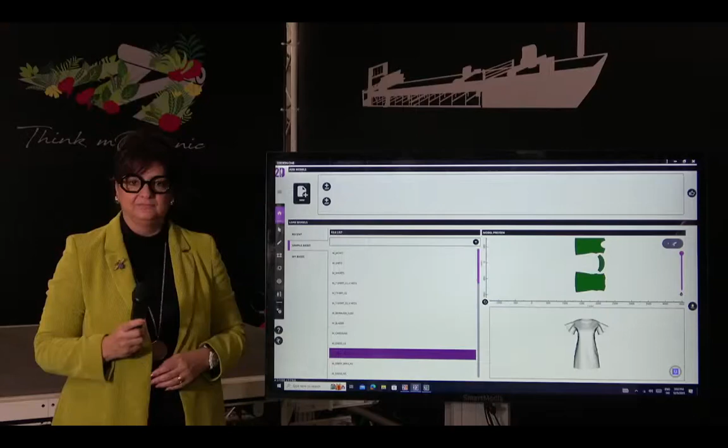I'm talking to you today from our showroom in our head office in Adro, Italy, what we call Morgan 1.

As some of you may remember, we started this type of communication during the pandemic when there was no possibility to travel, no exhibitions, no meetings, and that was the only way we found to communicate with our partners, distributors and customers, and share with all of you what we were doing here. We believe that even though, thank God, this time has now gone and we are free to travel, to meet, to have exhibitions, this is still a good way to communicate and share in real time what we are doing.

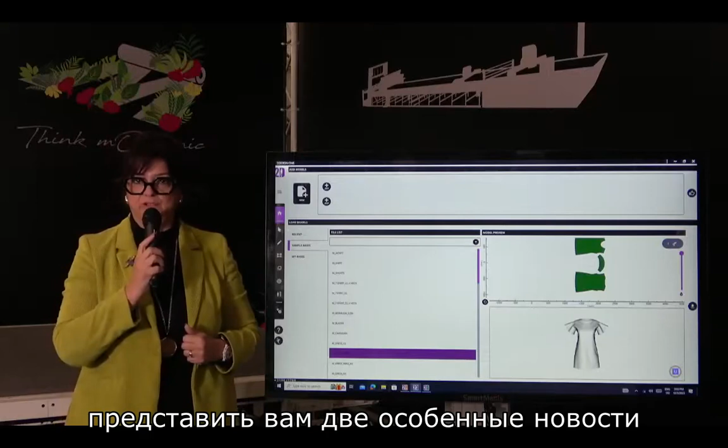Today we are here to present two very special pieces of news from our R&D departments. The first one we will start with is our new 2D CAD solution, especially the 2Design pattern designing module, together with the 2Capture and 2Tetrix.

Later we will continue with the presentation of the multiply cutter, the real superstar of the day, and its name is Rex.

Before I let Alessia take you through a general overview presentation of the software, I would like to spend a few words explaining how we made this project, and what our goal was in doing this project.

We wanted, first of all, to have full control of the software. So this software, all the packages, are completely made in Morgan. We are so proud of that.

I think Gianmario Bianchetti and his team from the R&D software department did an incredible job, because in just a short period of time they made a very, very strong and powerful system. You will see it in a few minutes.

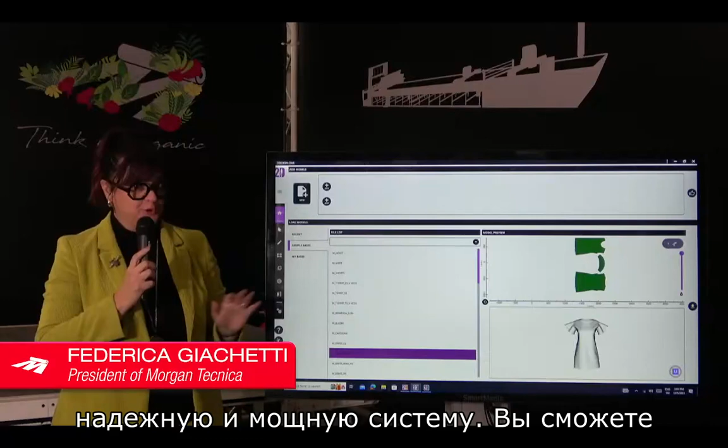One of the goals was to make it user-friendly. I know everybody says their own software is user-friendly, but this is for real. You will see, Alessia will show you a very minimal and neat user interface in order to make the new user immediately comfortable, and also to reduce the learning process and help somehow the self-learning of the software.

This is also very important. We know that the majority of the customers we are going to talk to are already using a CAD system, so in order to convince them to shift, to move to a new software, we must make this process as painless as possible. So making the learning easy is a really important goal.

Also, we want this software to be suitable for professionals with very high demands, but also for beginners, and this is very important. We want to create a new generation of CAD users growing up with us.

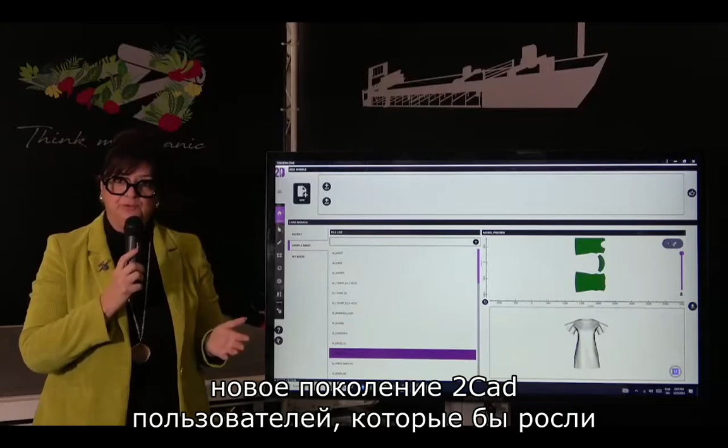So for beginners, we developed a very special feature called Sample Basis. It's a library of basic blocks that comes together with the software, a complimentary basis. So for those who don't have a library of old models, who don't have experience, they can start playing with these models, start gaining experience and practicing until they are ready to create their own models.

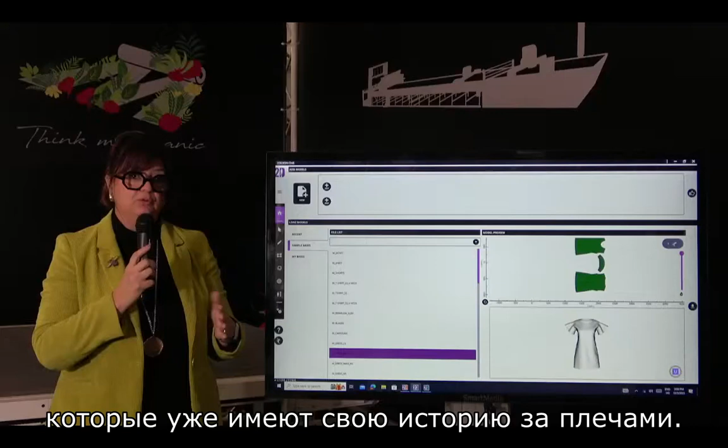For professionals who already have their own history behind them, we developed another functionality that we call My Basis. This is a library where each advanced user can store their own library with their own set fittings and use it as a reference for every new design that they create.

They can also decide whether to keep a link active between the newly created model and this original basis. So in case they need to apply massive modifications or alterations to all the models belonging to the original base, they can do it with one click.

These and many other features that Alessia will show you in a minute make us very, very proud of this product. So I hope you will enjoy the presentation. Alessia, it's your turn.

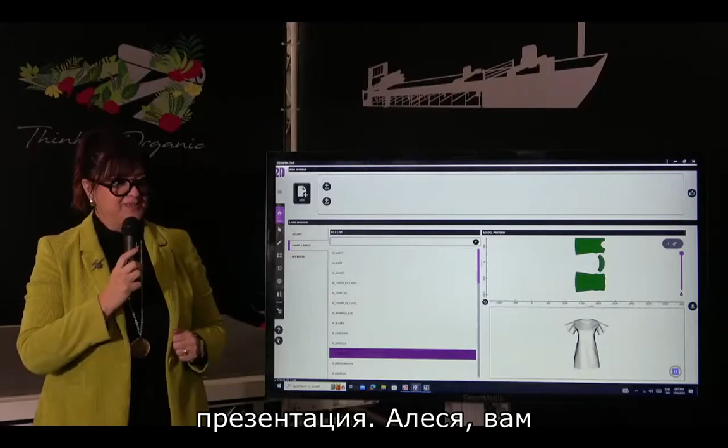Hello to everyone, I'm Alessia. I'm glad to be presenting 2Design and all of the new features that we have for the entire 2D CAD program package. As Federica anticipated, today we will be seeing 2Capture, 2Design, and 2Tetrix. 2Capture is for pattern digitization, 2Design is for pattern editing and model creation, and 2Tetrix is for nesting.

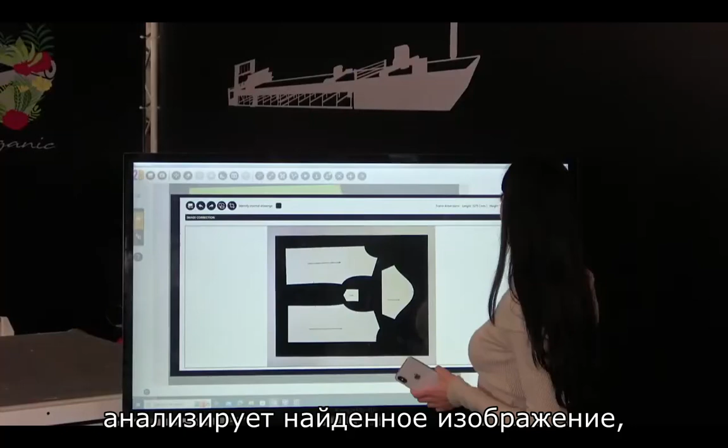From here, the program goes ahead and analyzes the image. It finds the frame, and without any calibration needed, I can go ahead and confirm. You can see how it digitized my piece, recognizing, for example, notches that we have right here. I'm going to zoom in so you can see we already have some notches.

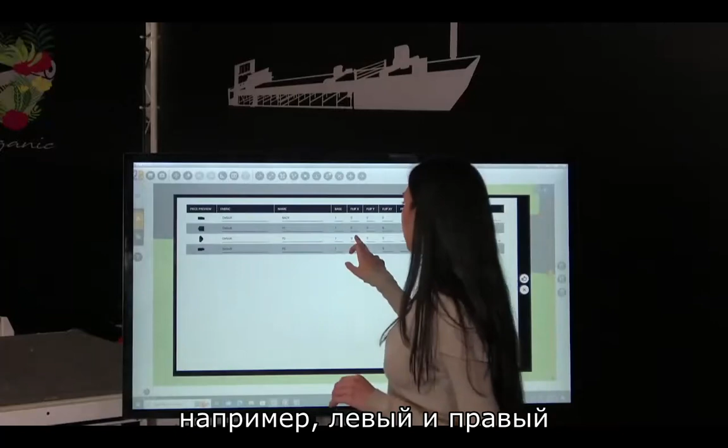I can go ahead and modify the properties of this piece. If I click on my piece properties table, I can see the fabric, and I can change that. I can change the name of my piece. For example, I can see from the preview that this is a back piece, so I'm going to write it right here. I can give quantities, for example, left and right for sleeves, and you can see 1 and 1. I can also add piece notes if I want to.

Once I have this, we can zoom in and out to check if everything has been detected correctly. We can also increase or decrease the contrast between the background and our piece to check if everything that's part of this model has been digitized. I can select points and move them around and make small modifications with the image on the bottom.

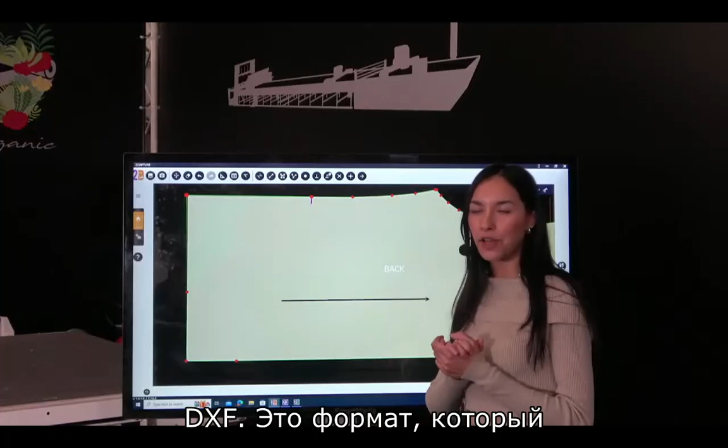So once I've digitized all my patterns and added the necessary modifications, I can export this file as a DXF, which is the format that communicates with all CAD systems. This is very important because you can share files with clients or customers that use other CAD systems, or integrate them into your already existing software. The other option is to export as a 2DY file, which is Morgan's native file format.

So talking about the 2DY, I'm going to start by showing you 2Design. From here, we can see I'm on the home screen right here. This is where I can go ahead and import pieces or models, either as a 2DY file, which is Morgan's native format, or as a DXF. This is good if you're coming from other CAD systems. We can import DXF files into 2Design.

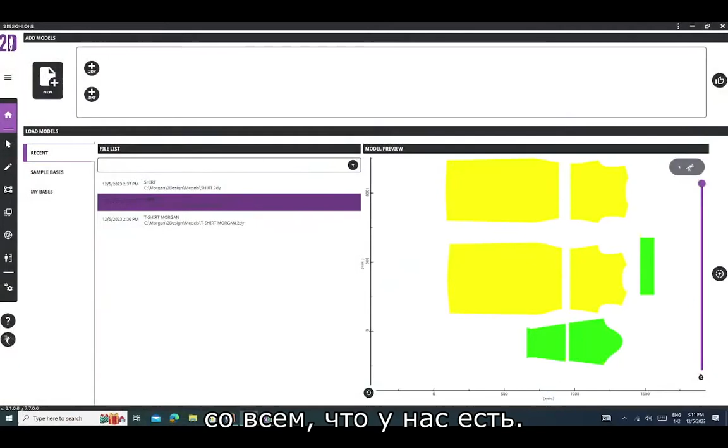Other ways we can start working is either with recent files - if I've worked on something recently, we have a preview right here on the bottom with everything. We have our sample bases, which are the bases that Federico was talking about before. Here we have a 3D preview of what the full model will look like once it's sewn together, and the preview of all the 2D pieces that can be then modified and personalized. This is great for beginners or someone that's never really used a CAD system.

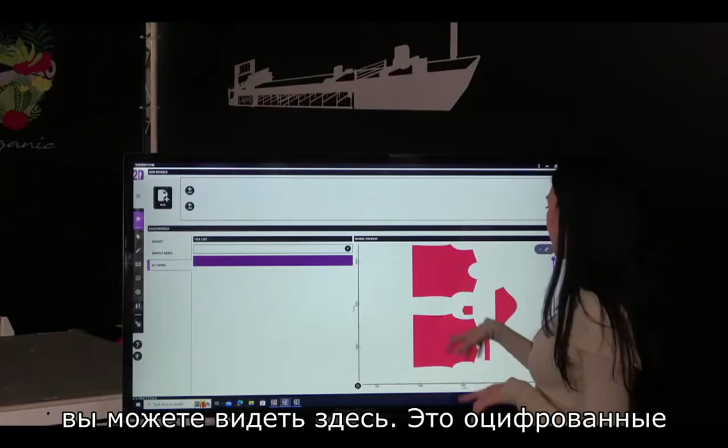You can start working and creating your own models from pre-existing bases. For more advanced customers or users, we can go ahead and create a MyBase library. This is a library where you can save your most used files. From here, you can copy pieces or entire models to create new files.

So what I'm going to do today, you can see here, these are the digitized pieces of my previously digitized 2Capture t-shirt. So I'm going to start creating a new model by modifying this pattern. What I'm going to do is select this. You can see I don't have any preview because it doesn't have any pieces. What I do have, though, if I move over here, is my technical sheet with an image of what my model will look like at the end. We can see it's a Morgan t-shirt.

It has 2 different fabric types, information regarding this piece. This can also be printed out if we need it. So if we zoom in like this, we have all of the information.

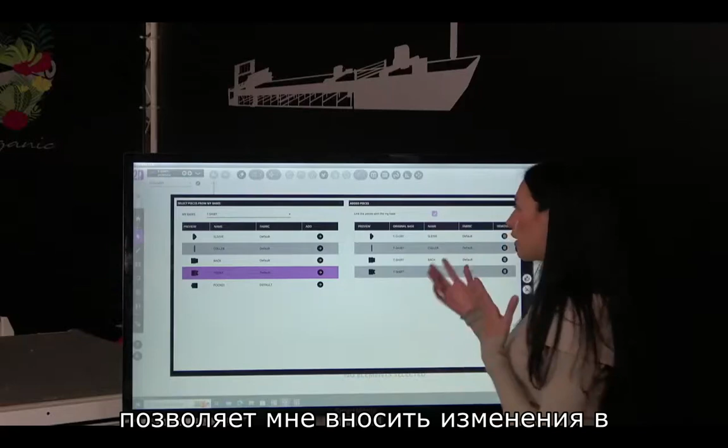Once I have this, I can go ahead and click on the import. This will open up the MyBase library, and it'll show me all of the files that I have saved. From here, I can go ahead and select the pieces that I want. For example, I don't have a pocket, so I'm going to ignore that and only import the rest. From here, I can decide if I want to create a link between the pieces and the MyBase. This allows me to make modifications in the future and have them applied to all the connected pieces. You can see right here, my model has been imported.

I can go ahead and save it. You can see right here next to the piece name, we have a little star that reminds me that these pieces are connected and imported from a My Base. Again, this link can be created and unlinked anytime we need to.

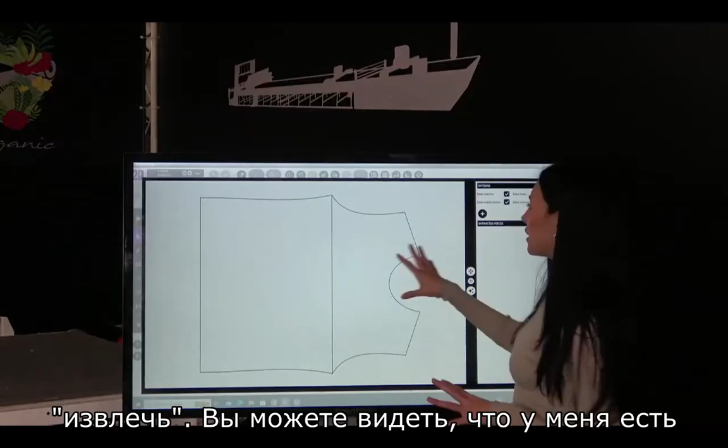From here, as we were seeing before, we have 2 different fabrics. So I'm going to divide the top using our new function, extract. I have an internal drawing line that allows me to divide my piece into different sections. Let's give it a second fabric name. I can clear this and set the second part, Fabric 2. Again, in our extraction window, we have a preview of the pieces we are about to extract. I can confirm, and then we can see our pieces.

Right here, you can see how they have a different fabric color. And we can see also on the list over here, I'm going to have the name of the model, the variant name, the fabric name, and then the piece name.

So I want to show you a little bit the setup of 2Design. We have here on the left side of the screen all of our working modes. To make the software easier and more intuitive, we've decided to divide the program into different working modes. Each working mode, as you can see as I switch between working modes, has different functions and tools that all relate to that specific mode.

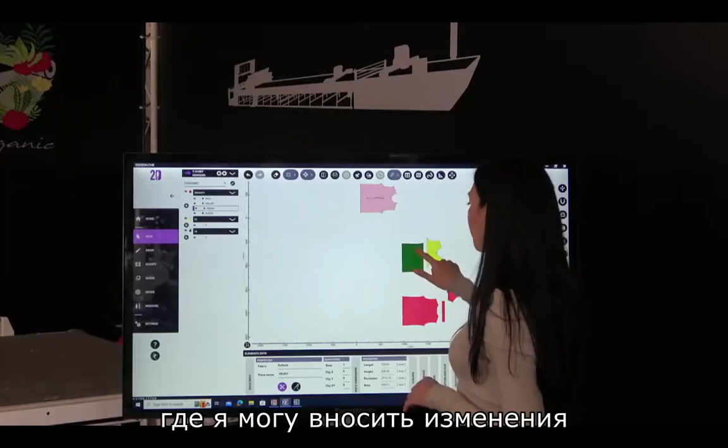Again, the view mode is where I can apply modifications to the piece, move them around, view the piece properties. For example, I can zoom in on this piece. We can rotate it. We can flip them using the grain axis, or flip them.

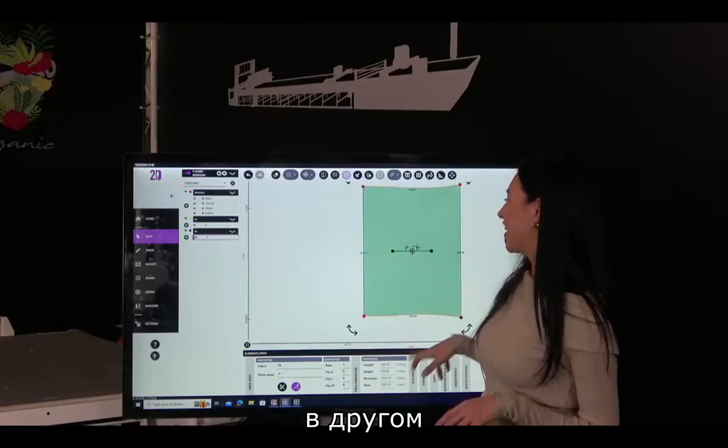You can see here I flipped the piece, and the program reminds me that the piece is in a temporary position at the moment, and that I have it flipped compared to the original image. If I want to confirm this as the default position, I can click here, and you can see the color has filled up. Again, I'm going to flip it back because we need it in the other direction.

Okay, perfect. So from here, I'm going to show you importing another model. I'm going to import a dress.

So we can see here that at the moment I have multiple models all uploaded at the same time. This is noticeable both by the pieces. Over on this side, we have the model name and all the pieces. We have our different working modes where I can modify and move my pieces around.

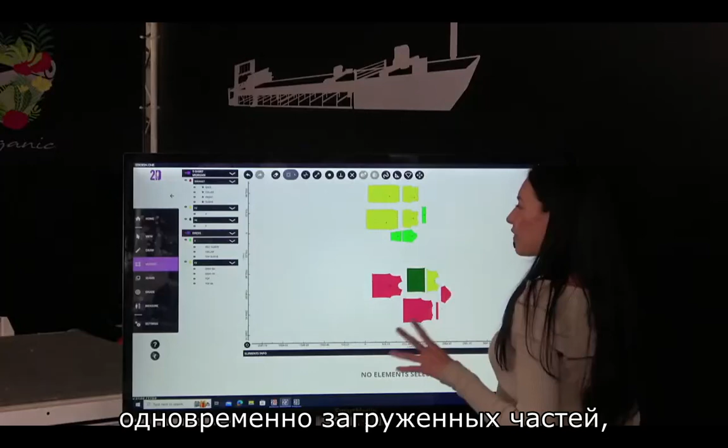Again, if I have multiple pieces uploaded at the same time, multiple models uploaded at the same time, I can apply modifications to both of them simultaneously. So you can see that I've selected the ends, for example, moving with the arrows on my keyboard. Let me move over here.

You can see how the ends are being modified, I'll zoom in a little bit. So you can see both on my skirt and on my t-shirt, they're being modified at the same time, even if they're part of different models.

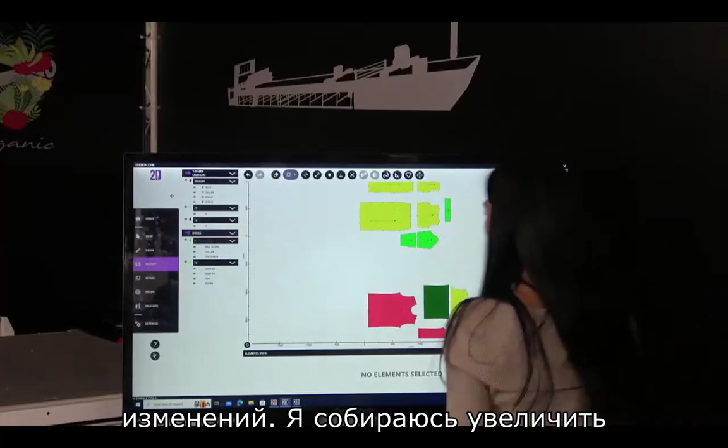So what we also have is the ghost function. This allows us to see a track of the previous piece after modifications. So I'm going to zoom in on specific parts.

For example, you can see I selected that specific point. Zoom out a little bit. With the ghost mode active, if I move... never mind, sorry, the touch screen.

Okay, since we're in the modify mode, I'm going to use this. Do we want to switch to the sharing of the screen so you can see details a little bit closer?

Okay, I'm going to remove the t-shirt so we can focus on one model at a time. And we will see right here we have our dress.

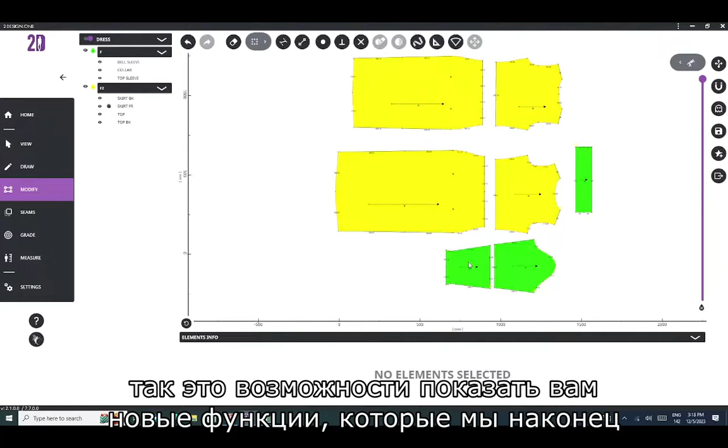What we're very excited to show you is the new functions. We finally implemented darts, pleats, and flaring. So to activate those functions, what I'll do is, for example, let's add darts right here on this skirt. I'm going to zoom in so you guys can see better.

From here, you can see that I can select which element I want to use: darts, pleats, flares, or fold dart, which is going to close a pre-existing dart.

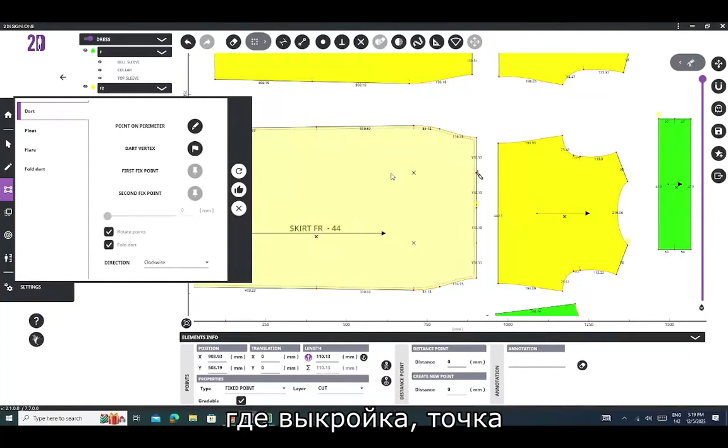The program, again, very intuitive, tells me step by step what I have to do. So we can see here, it wants me to select a point on the perimeter. This is where my dart is going to start, the dart vertex, and then two fix points that are going to maintain this position. From here, you can see I already have a preview of what our dart is going to look like once I confirm.

I can either just move this around or insert a specific measurement. For example, we can just write in here. Let's do 30 millimeters, confirm. And as soon as I click the thumbs up, the program will create a dart.

I'm going to go ahead and create another one on this side. Again, first point, vertex, and then my fix points. This time I'm going to create the same one, so 30, confirm, and I'm not going to fold the dart, so you can see the difference between the two. You can see right away here I have the two compared one to the other.

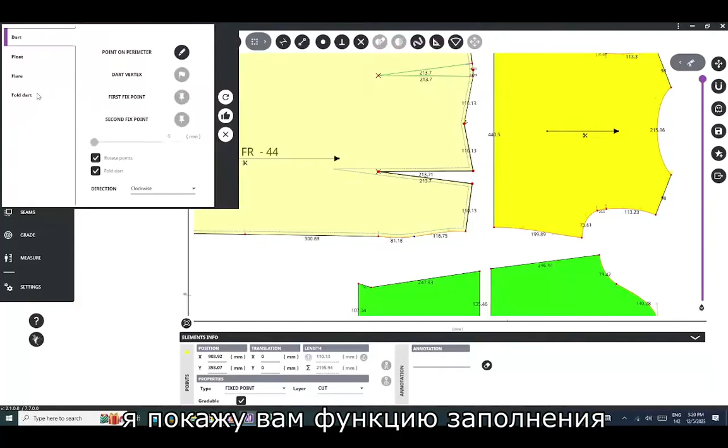What we can also do is, again, I'm going to show you the function to fold darts. So I'm going to select point 1, point 2, and confirm. And you can see how it created a closed dart.

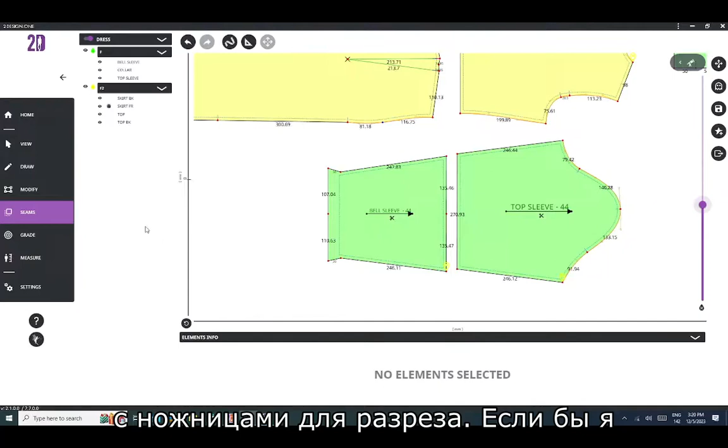I already added seam lines that you can see here on the inside. If I go to the seam mode, we can see, for example, by selecting, I'm going to make this a little bit less intense. You can see how I have seam lines on the inside of the pieces. And I can recognize if the pieces are projected on the cut line or on the seam line by this little icon that we have right here, which is either scissors for cut line, or if I were to switch it, for example, like here, and go to the seam line, you can see how the seam allowance automatically is applied on the outside.

So from here, I want to show you one more thing on the seam allowance. We also have the possibility to view the seams with all of their grading. You can see how I have all my notches on each side. And moving to the grading here as well, I have the possibility to view both the grading of the actual piece shape and the grading with the seams. We can see this with the difference between full line and dotted line.

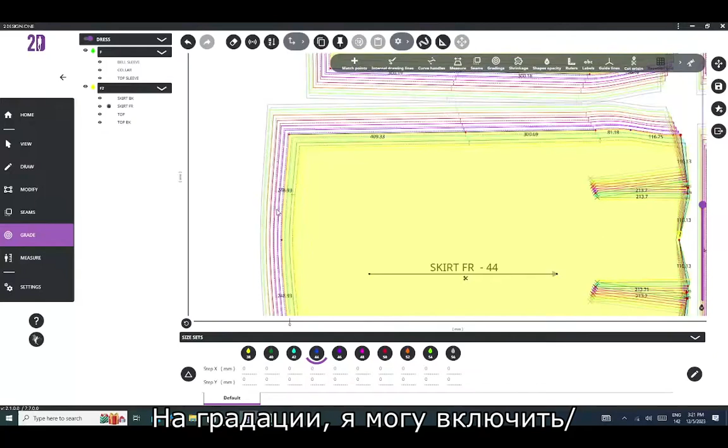On gradings, I can decide to turn on and off some sizes. For example, if I want to view others a little bit more clearly, you can see I have these. Again, it's possible to also hide or show the seam allowance.

It's very simple to edit the grading. We can simply just select one point, and on the bottom here, we can see all the steps it does from the sample size to the bigger and the smaller sizes.

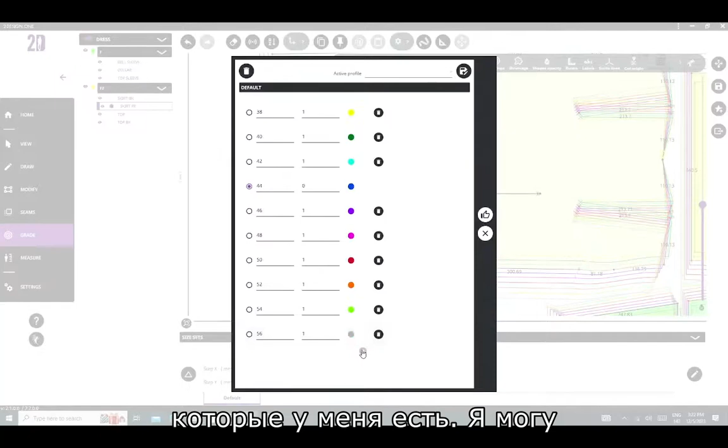To edit the size set, we can click here on the Edit Size Set window. This is going to show all of the sizes that I have. I can add a new size, for example. Let's call this 58. Confirm. And you'll see how this gets automatically added to the existing sizes. So you can see it right here, and I can recognize this by the color, that it matches perfectly.

From here, I'm going to move back to another model where I want to show you a couple more functions. So we're going to upload this shirt. And I'll go back to my touch screen.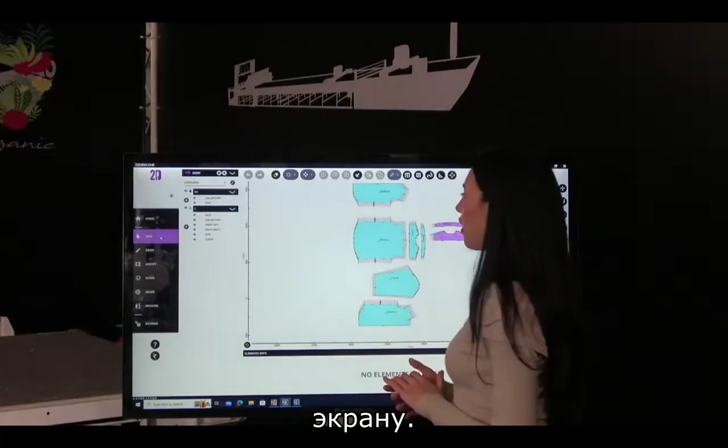Okay, so right here we have a shirt model with all of its gradings. We can see we have two different fabric types. This is going to be in blue, the main fabric, while we have these two pieces that are going to be going through the fusion block system when we cut. What I want to do here is this specific model will be placed on and cut on a fabric that has repetitions.

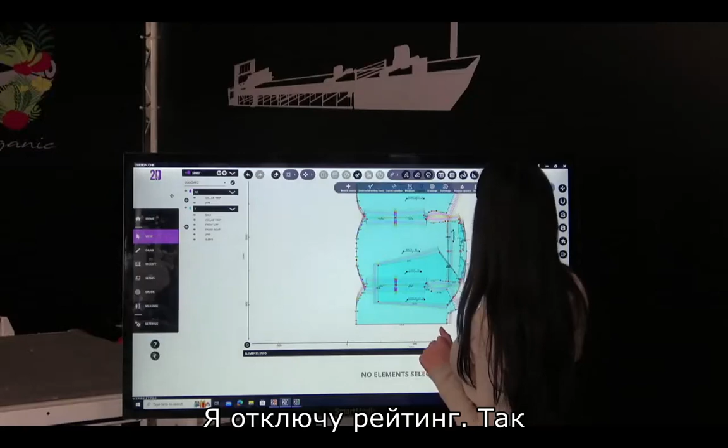So I created a link in between all the pieces. And you can see when I click this function, it brings back all the pieces to the position that I linked them on. I'm going to turn off the grading so it's a little bit more clear. You can see how all the pieces were positioned. Again, I can move them around and work on them more.

And every time I want to go back to see them in the actual position, I can just click this again, and it's going to bring them all back in. So from here, we're back on the view mode.

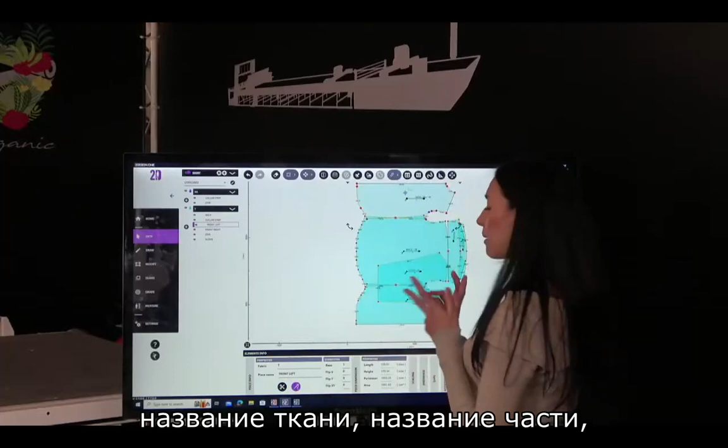This is where I can apply, for example, the piece info, so change the fabric name, the piece name, the quantities. I can preview piece dimensions, so you can see it right here. We can see the area, the perimeter, and all the information we might need also for nesting.

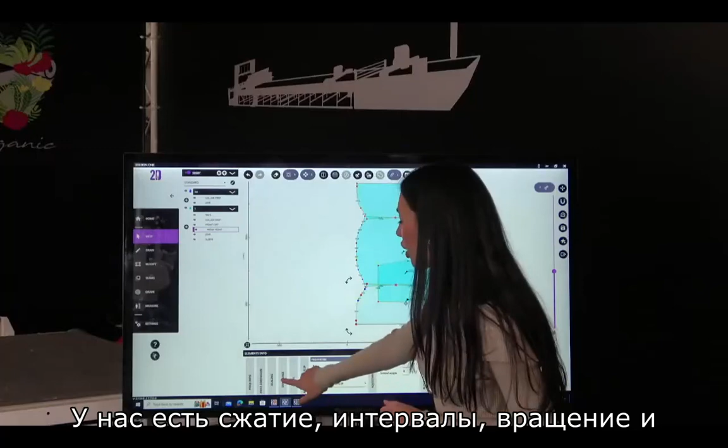We also added the possibility to give nesting properties directly from 2Design. This is great because it allows you to give specific properties to models or to the selected pieces. These will be applied every time I create a new marker using this model, with those settings already in place. So we have shrinkage, gaps, rotation and flip of the pieces, adjustment angles, and block contour if I want to add that.

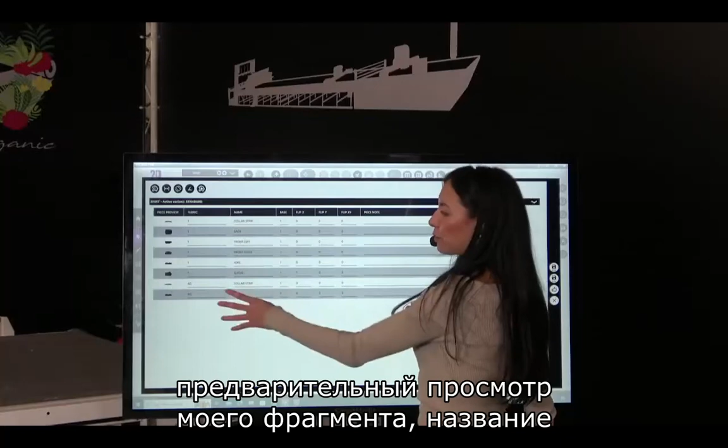So we can see it from here. It's going to show me the settings of the selected piece. Or if I want to, I can open my piece properties table. This is where I have a small preview of my piece, again the fabric name—we can see we have two different fabrics. The piece name, and on top here, I can activate other columns where I have all of those other settings, the marker settings.

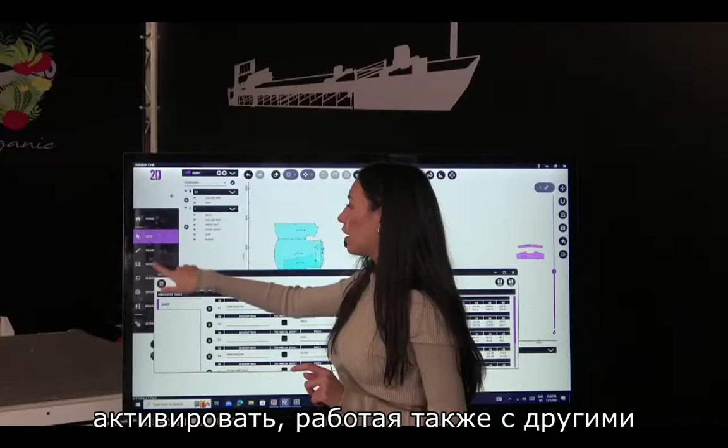So from here, I want to show you quickly our measure mode. This is where we have our measuring table. The measure table on 2Design is a secondary page that I can have active while working also on other modes. So if I want to draw and then see the measurements, I can do that.

So let me zoom in over here, so you guys can see a little bit better. Go to the measure mode. And if I select existing measurements from here, it's going to highlight directly from the model what I'm showing. So you can see, for example, right here, we have the sleeve shoulder length. And what I want to show you guys, if for example, let me select this and move this out of the way.

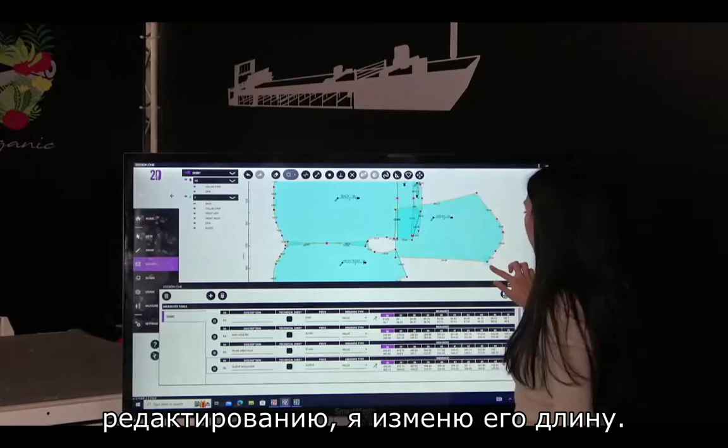Perfect. So if I go to modify, and I modify the length of this, again I'm using the arrows on my keyboard, you can see how simultaneously the measurements are updated.

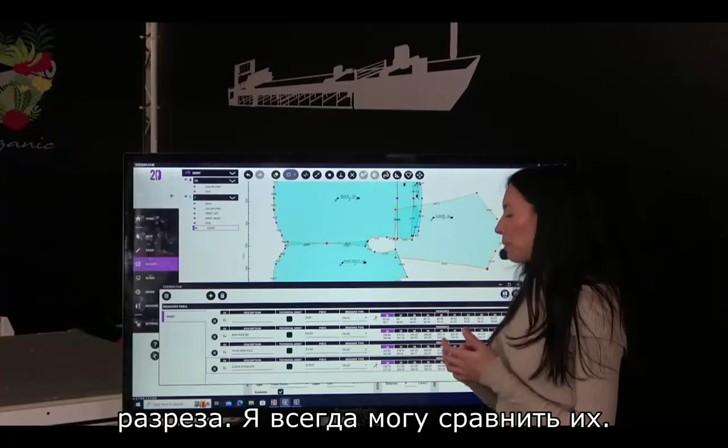And we can see two different rows of measurements. One is for measurements on the seam line, and one is for measurements on the cut line, so I can always compare those. The purple size is going to be our sample size, and all the other ones are the graded sizes. Again, this is also printable as a PDF format, or I can export it as a CSV file for Excel.

So once we created this, I'm going to move over to Tetrix so we can nest our model.

Again, you can see throughout all of our programs how the interface is very similar. Also for Tetrix, we have our working modes here on the left side. We have our home page where I can import, again, DXF files, so it makes it compatible with all file systems. So if you're receiving files from external people, you can import a DXF file, or a 2DY file, again, from the Morgan system.

I can import my shirt model, confirm, and it's going to go to the create order page. From here, I can add my file to the order. I can select the sizes I want to nest. For example, I selected size 36, 37, and 38.

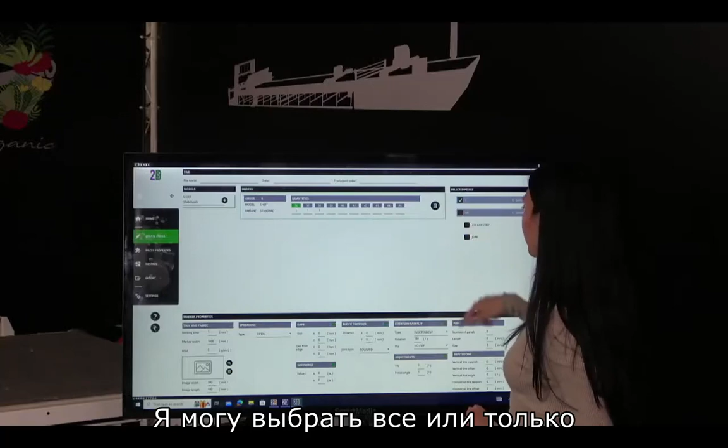From here, we have the list of all of our pieces. We can see the two different fabric types right here. And I can select all, or just select the individual piece. Again, this goes like that.

Here we have all of our marker settings that we saw also in 2Design. Let me show you again so we can see it right here. These can be set up both on 2Design or Tetrix. Tetrix will apply them only to the specific marker that we are creating.

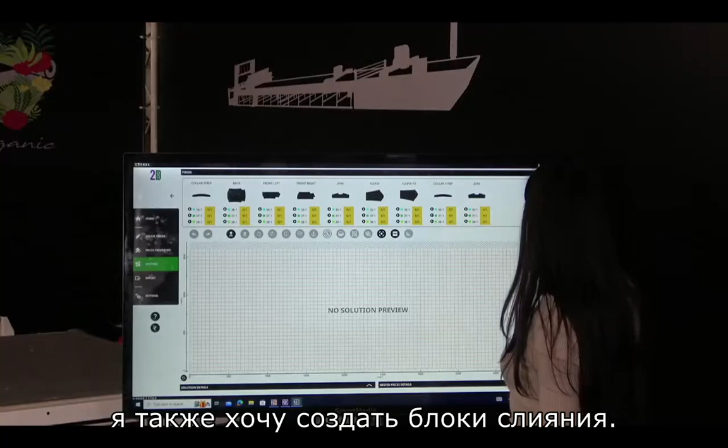So, as I said previously, we want to create a repetition. So I'm going to do 50 by 50, confirm, and you can see already I have our grid right here. On the top, we have a preview of all of our pieces and all of the sizes that I've selected with the matching colors.

So what I'll do, I want to also create fusion blocks because, as we saw before, I want some pieces to go through the fusion system. So you can see here that it automatically created it all for the other sizes. I'll modify the time. Perfect.

Confirm. I'm going to nest all my pieces. So it's going to nest my fusion blocks first, and then it's going to start placing all of my other pieces.

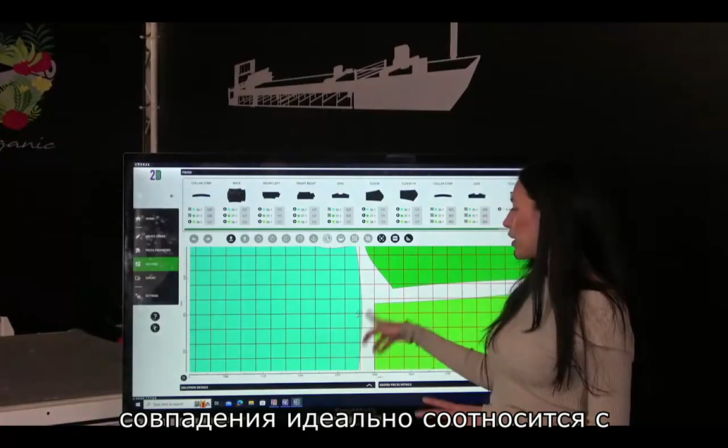I'm going to stop here so we can check it out. You can see how I placed all my pieces on the perfect repetition, and I have my fusion blocks right here that I've generated. What we can see apart from the piece are these symbols on our pieces. We have a plus sign, which recognizes the match point. The match point snaps exactly perfectly to the center of the repetition I created, so you can see this plus sign right here.

Other signs that we have are this little eye right here, which we've defined as a checkpoint. This has been added to work with the Ply 1 cutting machine from Morgan for nesting on stripes and plaids. This allows me to check on the marker and on the machine if my repetition matches perfectly between the pieces that have to be sewn together.

So once we've created the marker, we can go ahead and export our files. From here, we have the possibility to export ISO files, which is for the cutting machine. Again, we're going to always have a preview of what the ISO file will look like, and we have the possibility to select the specific elements I want to export.

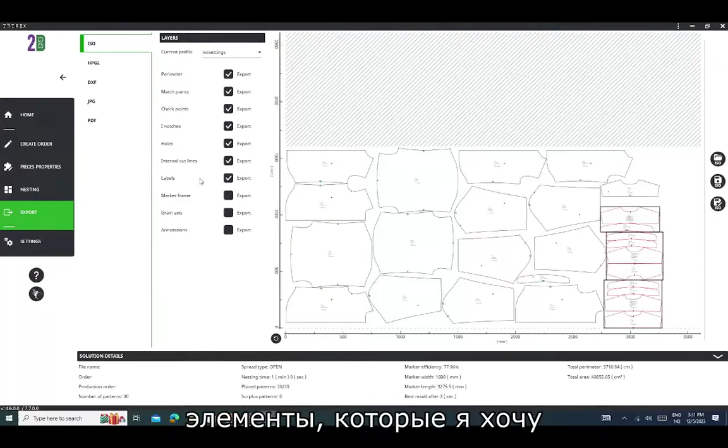HPGL is for the plotter machine. Again, the same concept goes for the HPGL. We're going to have the possibility to select which elements we want to export.

DXF can also be exported from Tetrix. We have the JPG, which is going to be a small icon of what the marker looks like, and finally the PDF report. This contains all the information of our marker, a little preview. This helps out the operator when picking up the pieces; he'll recognize the sizes, the quantities we have, what the order is, and so on. Again, this can be exported as a PDF file, printed out, and saved.

So I'm going to show you a couple more nesting options. Let's load a different file. So again, I'll select some sizes, confirm. I'll select just the main fabric for this time.

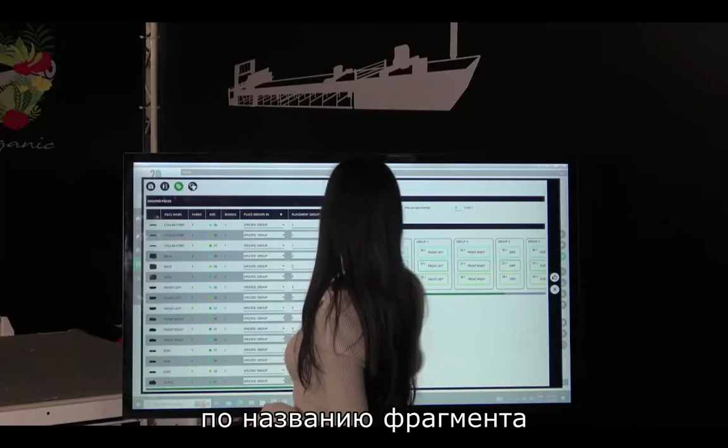What I want to do is create a marker with placement groups. With Tetrix, we have the possibility to create automatic placement groups by selecting if I want them by bundle, by size, by fabric, by piece name, or by fabric type. In this case we only have one, so it's going to only be one group. I'm going to select by bundle, confirm, and allow it to nest for a second.

Perfect, you can see right here how they've been divided. Again, I have the possibility to view more elements, so I'm going to activate everything so you guys can see. You can see how we have seam lines, our grain axis, and our groups are divided. Let me zoom in so you guys can see here. On the top right, it already tells me the length for each placement group. This helps with the laying of the fabrics when we want to create mattresses, for example, for multi-ply cutting.

And again, same thing here, we can export our files and create either an ISO file, HPGL, JPEG, or PDF.

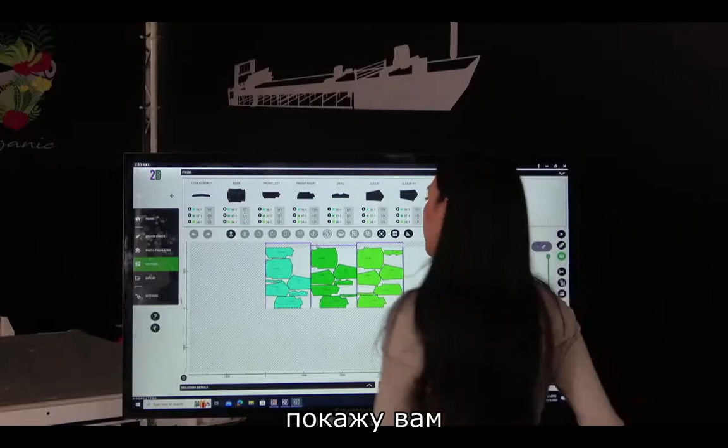Okay, so we have more time, so I'm going to keep showing you other functions that we have. For example, I'm going to ungroup these and show you.

The shading. So we have the possibility, for example, in some fabrics that have shading - denim, for example - it happens very often that we want to place specific pieces or specific sizes in a shaded area. So we can create this by selecting the shade area. Let's do this, 600. And then I can go ahead and select the pieces that I want to place inside of this.

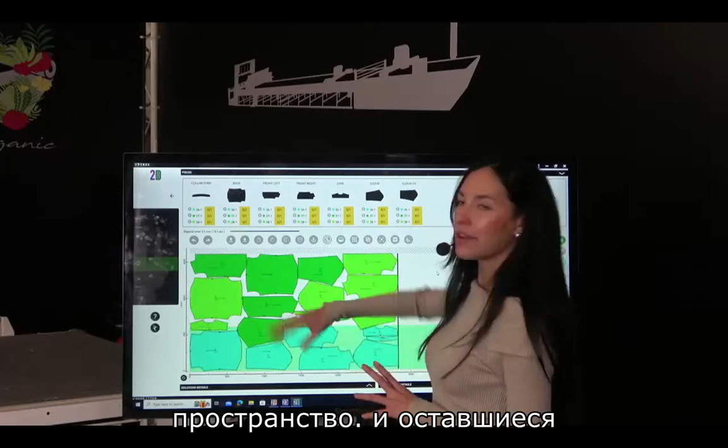So I'll select all of the size 36, confirm, nest all pieces. We're going to notice how all the pieces that are size 36 are being placed inside of the shaded area. The other pieces are free to move wherever they want - some are placing where there's available space in here, and the rest are placing freely. If I wanted to create one specific shade for each size, I can just go ahead and select the specific pieces.

From here, I also want to show you the defects. We can go ahead here and manage fabric defects. With defects, we have the possibility to select between horizontal line, vertical line, or a rectangle. To do so, I just click on plus - you can see I have defect number 1. From here, I can select which one I want, for example, horizontal line.

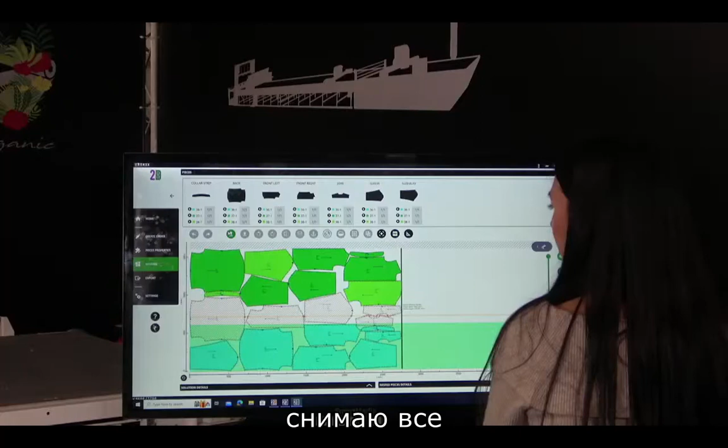I'll give it a width of 10 millimeters, and then an offset of 700 millimeters. Confirm. You can see right away it signals that the pieces I previously placed are in an invalid position because this is a defected area. So what I'm going to do is pick up all my pieces and start the nesting again. Now you can see that since I created the defect before starting the nesting, it's being ignored and excluded from the area.

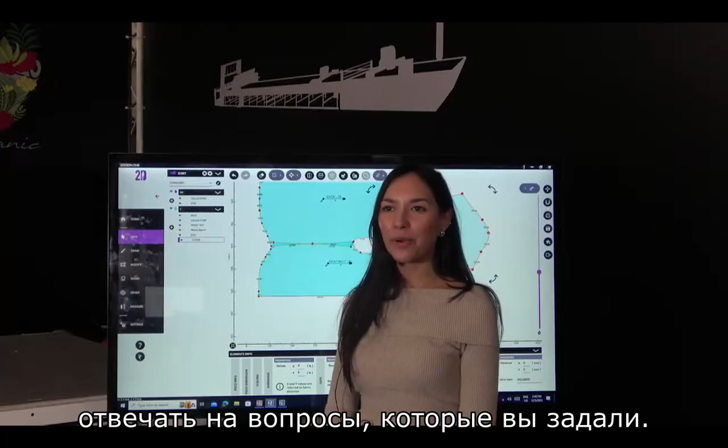Okay, we're back, so I'm going to start reading the questions you guys put in. The first question is: is 2Design fully compatible and working with standard DXF file format? Does it import and export not only HPGL and AAMA files? The answer is yes, it is compatible with different DXF formats, not only AAMA and ASTM but also DXF standards. We can also export standard DXF files with 2Design.

So if I go to the settings, right here we can see we have import profiles that we can personalize. Directly from here we can assign specific layers and settings so that everything is read correctly. And we can export, again you can see right here, export as standard DXF files. This makes it compatible with other systems too, for example Illustrator, if you want to add drawings or icons on the pieces. For DXF, yes, and this is also good for furniture and automotive, which use DXF standards. We always recommend exporting in blocks, because this is very important—it allows us to recognize the full shape and perimeter of the actual pieces.

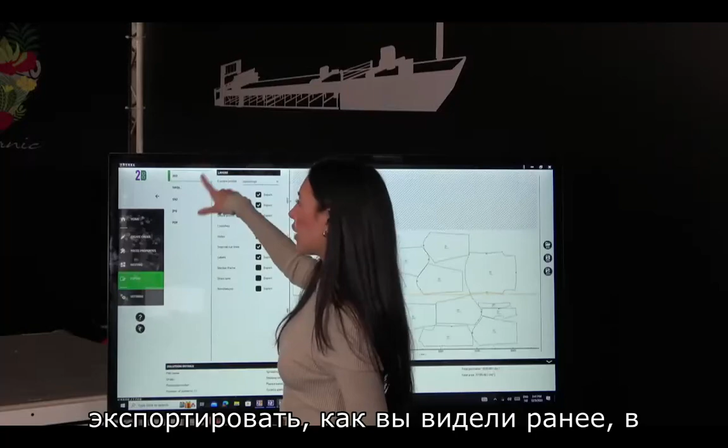The other question is, in Tetrix, is it possible to export in Excel format or CSV? With Tetrix, we can export, as you saw, ISO, HPGL, DXF, JPEG, and PDF—these are the files available for Tetrix. But with 2Design, we have CSV. This is where we can export; for example, you can see on the property table right here how we have the possibility to export a CSV file.

So I think we have other questions. Sorry, let me read.

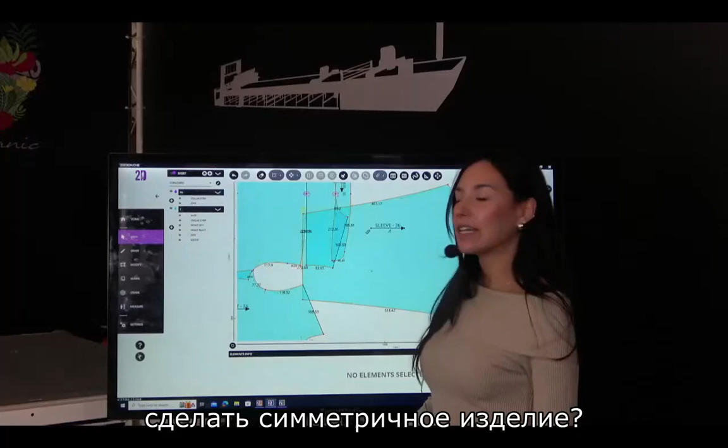The other question is if we can symmetrize a piece. Thinking about it, I'm not quite sure, so I want to introduce Morgana, our colleague. As you can see here—hi, Morgana, how can I help you? She's going to help me out with your question. Okay, letting her think for a minute.

Perfect, so as you can see, it says how to symmetrize a piece in 2Design, and it lists all the steps I have to do. I can keep Morgana open here while I work, for example, and move her around. I'm going to go ahead and actually symmetrize a piece following her steps.

So she says to go to the modify mode right here—you can see I've selected the modify mode. I'm going to zoom out. Let's select, for example, this piece. Sorry, let me move it myself. Okay, right here, modify—I'm going to zoom into this piece so we can see it better.

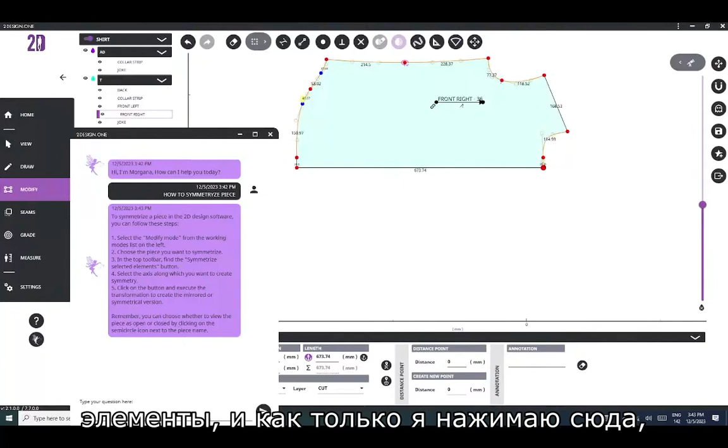She tells me to select the piece I want to symmetrize, and then on the top toolbar I'll find the Symmetrize Selected Elements button. Once I click this, you can see how it's added a symmetry axis. From here, I can decide whether I want to view it as closed or open, and we can select it right here. You can see how we have our symmetrized piece completely open.

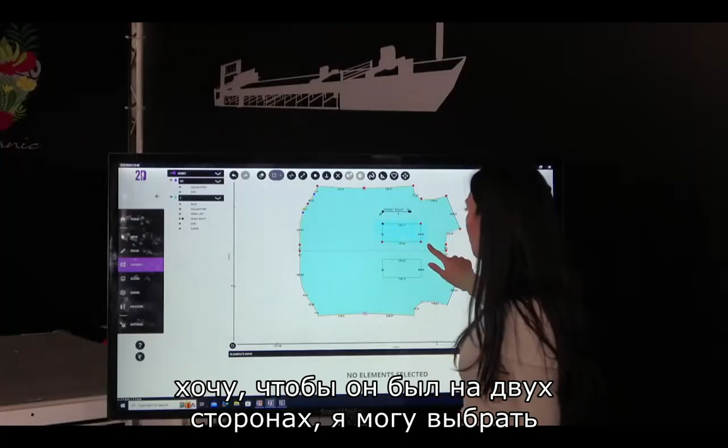What's cool about symmetrized pieces in 2Design is that we can also add internal elements. For example, let's draw a shape right here—I'm going to draw, let's say, a pocket. It automatically gets symmetrized on the other side, so we can see it's mirrored. But if I don't want this on both sides, I can select this internal drawing and say that it's not symmetrizable, so in this case I only have it on one side.

So again, I always have the possibility to view them open or closed, and all of the symmetrical pieces will be displayed over on this side with this icon. So do we have more questions?

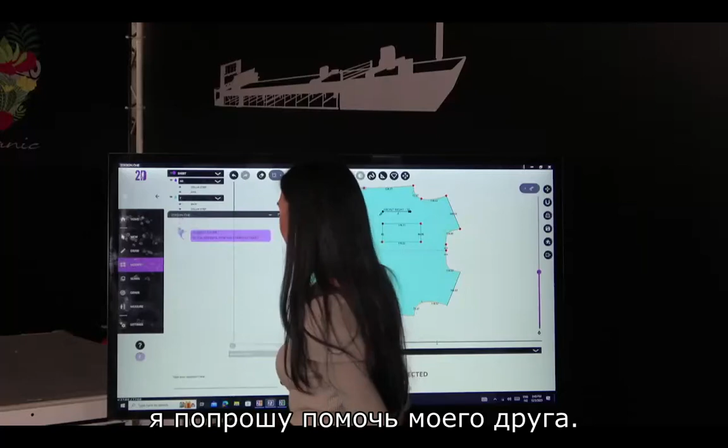Okay, the other question is, how can I modify notches? So again, I'm going to ask for help from my friend Morgana. How can I...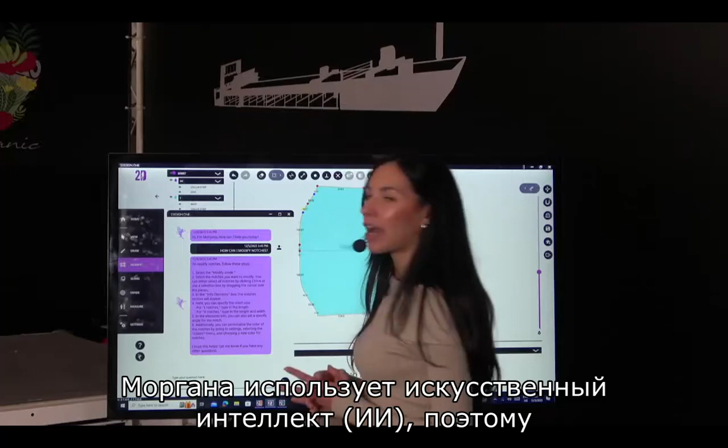So again, I'm going to let her think for a minute, and let's see how we can modify notches. Again, you can see how Morgana gave me the answer. We have all of the steps that we need to see from Morgana. Morgana uses artificial intelligence, so she will analyze all the information she has about 2Design and Tetrix and put them together to create the perfect answer to the question that I have.

Okay, so another question we have is what languages are available for 2Design? Again, let's ask Morgana. Okay, so you can see how she says that 2Design is available in English, Mandarin, German, Spanish, French, Hungarian, Italian, Polish, and Russian.

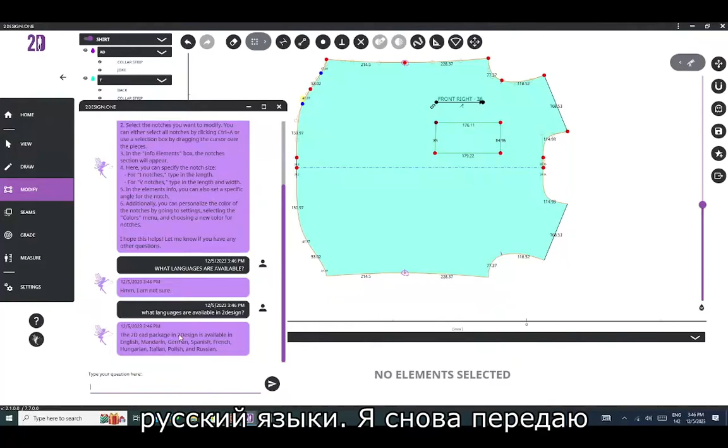So again, I'm going to leave the word to Federica, and we can stay here together. Okay, I think you enjoyed this presentation. I did very much, and Alessia, you did an incredible job. Very, very happy. So how do you like Morgana?

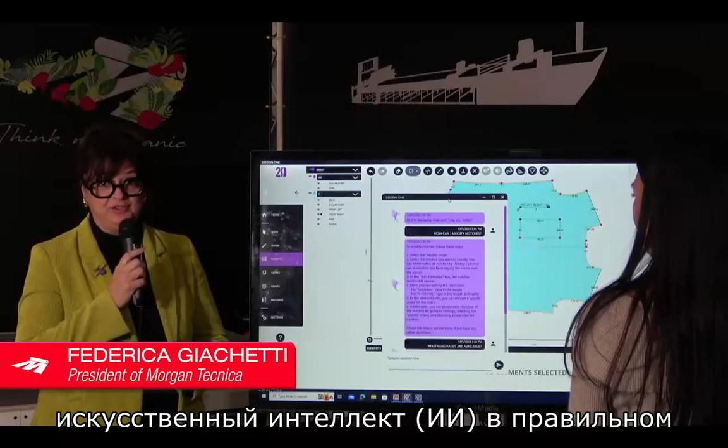Morgana is the scoop of today. We are using artificial intelligence in a good way. There is a lot of discussion about that, but we believe it's an opportunity, an incredible opportunity. Imagine the users having the possibility to access a quick answer to any question they may have during the use of the software, regardless of office time, regardless of time zone. In any moment they can ask and get a professional answer. So it's a big, big help.

I know there is another question about the defect, how the defect information comes to the system when we do the marker in Tetrix. If they come during the spreading or before. No, ideally they should come before, from the fabric inspection, and all we need to know is the dimension of the defect and the position of the defect related to the edges of the fabric and to the beginning of the marker, in case it is an isolated defect. We try to avoid making this communication during the spreading, because as you can imagine, this would stop the production, and you would need to redo the marker once the spreading has already started, which is not applicable.

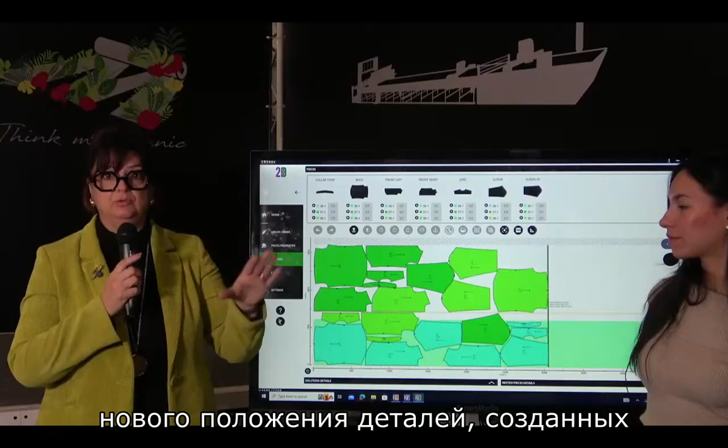A different story is if we are talking about single ply cutter, ply 1. In that case, we can detect the fabric and the defect during the cutting, and by importing this information, by editing this information in the onboard computer where we can install the Tetrix, then the marker can be remade in real time and continue the cutting with the new position of the patterns made according to the defect. But in multiply cutting, this is obviously not possible.

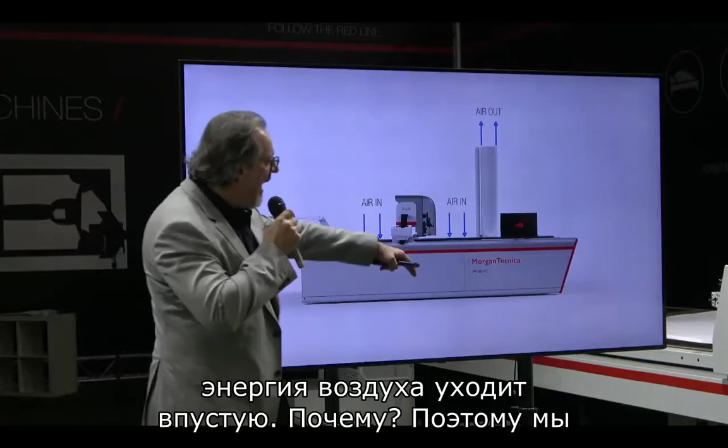The spin power, this is brilliant. All the cutting machines have a vacuum, so there is air going in and air going out. We were thinking, all this energy of the air goes to waste, so why not use it? We designed a special turbine called spin power, located inside the machine at the beginning of the chimney. Using the airflow, it rotates and creates power, and that power goes back into the machine.

The power saving estimated is between 40 to 50%, but the data we are collecting is much better. To be honest, it's almost too good to be real, so before we disclose it, we want to double check, but it seems really impressive.

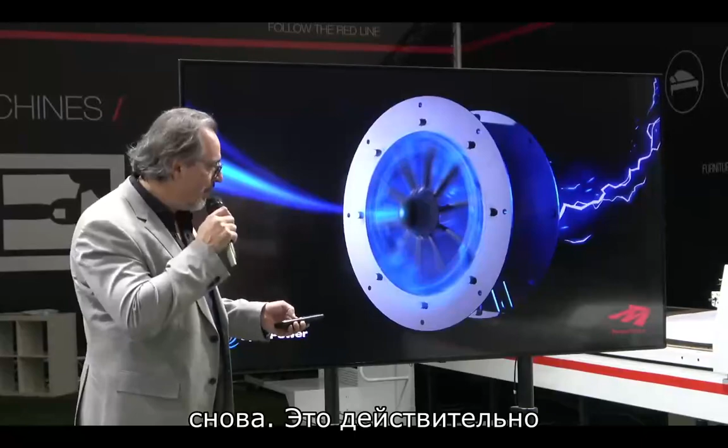Improved performances. Daniele will now give you all the details of what we have done to improve. Mainly we have working details, because the devil hides in the details—details in the cutting head, details in the sharpening, the vacuum system. Plus we have this additional patent. I'll try to explain the concept, but later Daniele will give more details.

Inside the marker, you may have one pattern which gives you trouble because the shape is complicated. If you want to cut it right, you simply have to reduce the speed, maybe apply other features like increasing the RPM, increasing the vacuum, or changing the angle of the blade. But typically you simply reduce the speed. Because of that pattern, you're forced to cut the whole marker very slowly. This gives you the possibility to identify that pattern and apply the rules only to that pattern. So in the end, you cut the marker at regular speed, and only that specific pattern is reduced. This is a big improvement.

Now I give the word to Daniele. Daniele, try not to break Juan Pablo's machine, because this machine is going to ship in a couple of days, okay?

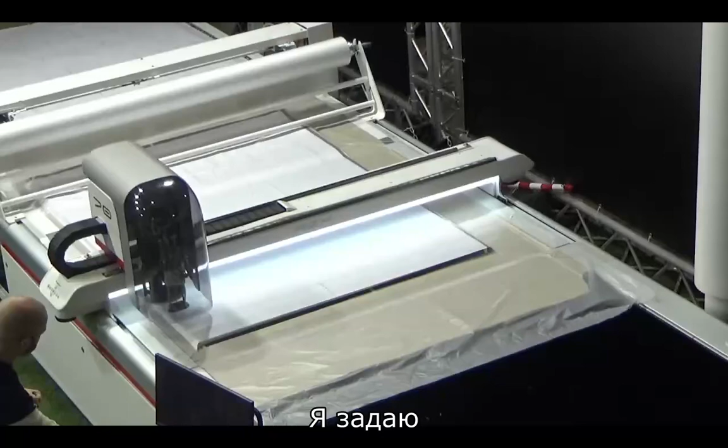I want to ask you to check the cutting speed. I'm starting, give origin, align, and then cut. Okay, I repeat, we are speaking about 60 plies of denim jeans. It is a 12-ounce denim jeans, and here you can see the cutting speed.

Let's speak about the new algorithm that we built, which relies on continuous advance. We want to keep as close as possible to the exiting side. We want to keep the cutting area tight in order to reduce as much as possible the used vacuum.

As you can see, I hope from the cameras, at every moment that it can, the machine tries to come forward in order to save power. So as much as possible, a lot of the time, the machine tries to go forward.

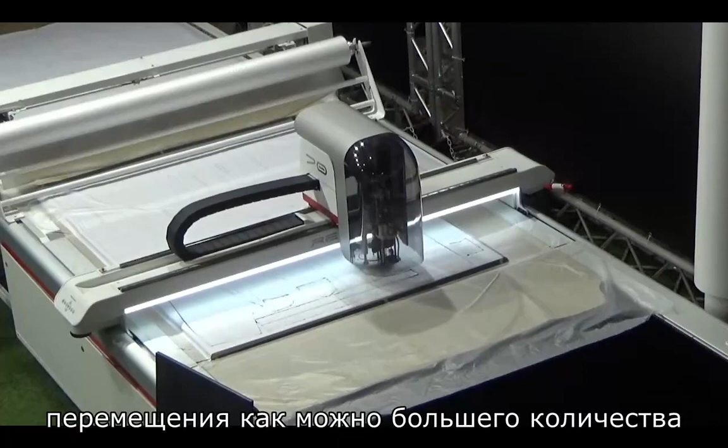Now we will cut. This marker is a zero buffer marker, like always. By the way, I want to highlight not only the speed, but also the algorithm that we developed in order to move as much as possible all the pieces out without losing performance.

As you can see, the pieces are starting to exit. Inside this technology, we can see that all the rules, everything we did in the next series with the algorithms, with starting point, with proximity, with everything we did, is already obviously inside.

Fabrizio said one important thing before: in the beginning, we were only speaking about quality, about performance. But now, we almost don't speak about them when we are presenting a machine. Instead we are speaking about power saving, about reliability, about return on energy.

Let's think that all our equipment, all our machines work with a zero buffer method, so all the markers we are cutting are material saving. But this was already granted by the next series and next two series.